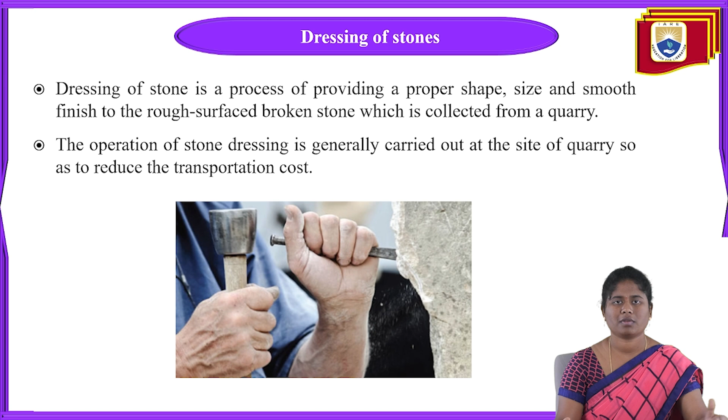Dressing of stones is generally done using hand tools like chisels, pickaxes, etc. Once the quarrying process is done, the stones are cut into suitable size and the surface is finished. As I told you, after quarrying, at that site we cut the stones into a specific or suitable shape or size. After cutting, we polish the stones so the surface is smoother.

Only then can we use the stones for aesthetic or decorative purposes, and for foundations also. After dressing, we use the stones for construction, decoration, and foundations. Once quarrying is done, the stones are cut into suitable size and shape, and the surface is finished; this process is termed dressing of stones. Effective dressing of stones helps make our structure attractive and also economical.

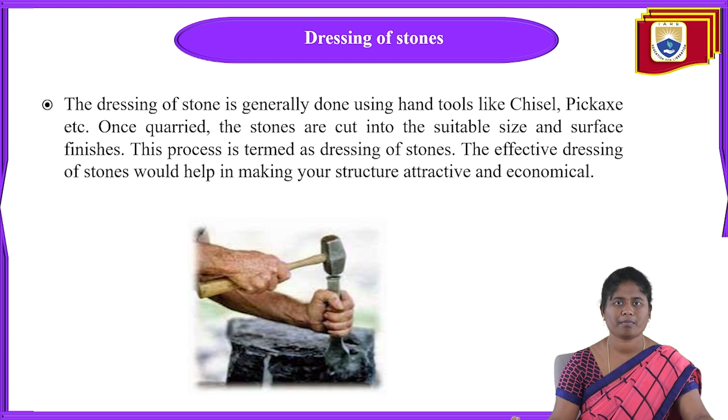What is the purpose of dressing stones? First we do the quarrying of stones, and after that, at the site itself, dressing should be done to reduce the transportation cost. We take machinery for dressing to the site, including different types of hammers and polishing machines. At the site we give the shape to the stones, cutting them into a square shape, and then polish them. Finishing and polishing are all done in dressing of stones.

Here you can see the four purposes of dressing of stones. The first one is less weight for transportation. If dressing is done at the quarry site after quarrying, we can easily reduce the transportation cost. That's why dressing of stones is done at the quarrying site.

The next one is appearance. After quarrying, the stones will be irregular in shape, size and texture, and there will be no smoothness. After dressing, the stones have a neat appearance. We neatly cut them using chisels and hammers, and then give them a smooth texture.

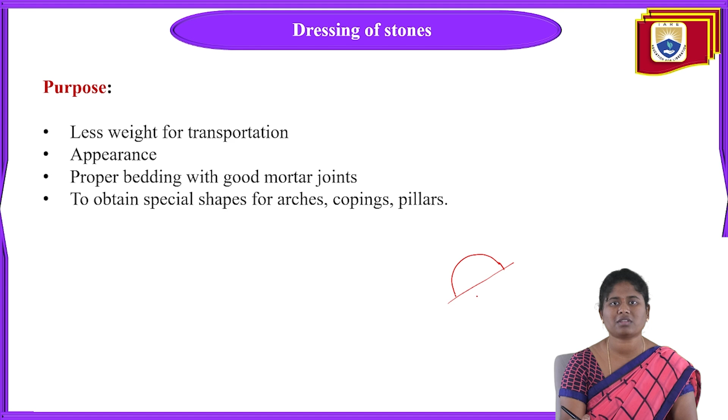There you can see why we have to reduce the size: big blocks of stones will be there, so we convert them to easily liftable pieces. After cutting the stones, we can easily transport them. That's why you have to cut the stones. This reduction of size is generally carried out at the quarrying site itself, especially to reduce the transportation cost.

The next one is to give a proper shape to the stone, because it can be used in different types of construction purposes, like flooring, foundations, walls, arches. The requirement of the stone is different for each purpose. In foundations, the stone may be irregular or angular, and in arches and flooring, the stone size should be different. That's why for each aspect we use different sizes of stones, and a proper shape should be given to the stones.

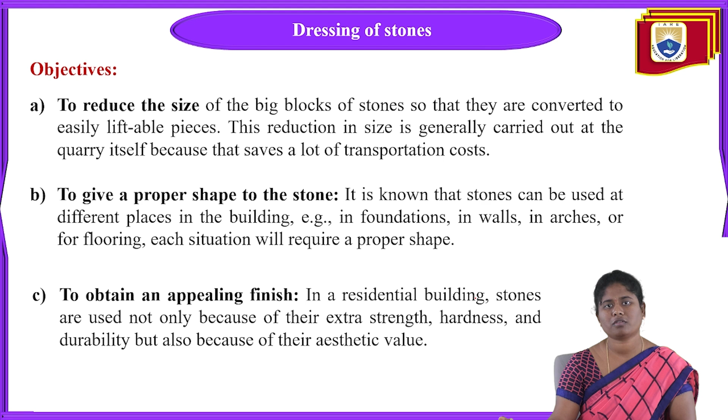Next one, to obtain an appealing finish. Appealing means beautiful, attractive. We can do this by dressing of stones. In residential buildings, nowadays stones are used for decorative and aesthetic purposes also, using irregular or rounded shapes, and we give those stones a specific shape. In residential buildings these stones are used not only because of their strength, hardness, durability, but also for the aesthetic value, meaning the attractiveness of the structure. That's why we do dressing of stones for different aspects in the construction field.

We have to draw this line, and that chisel should be taken to that line. By using this hammer, we have to make that rock into the desired shape. We can cut it into a desired shape.

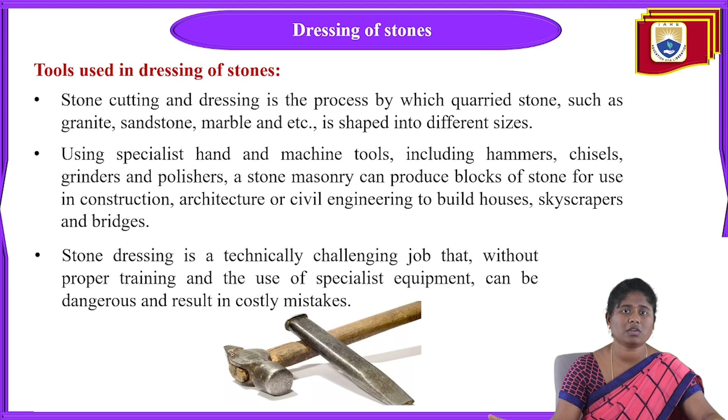If you take specialist people, they can do the work within a specific time. If you give the work to other people without specialization, it will be very dangerous and also time-taking. For this, whether machine tools or hand tools, specialists should take the work, otherwise it can result in costly mistakes. First one is the face hammer.

This face hammer is used for bigger and heavier stones. This double-faced hammer can break quarried stone into smaller blocks for preparation of finer dressing. This face hammer can be used for cutting stones and cutting them into small blocks also.

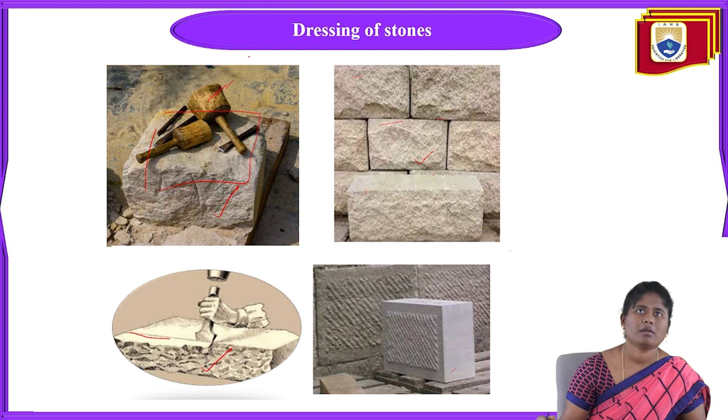For softer stone, it is cut using a wooden mallet - here you can see this is the wooden mallet. The face hammer can be used for strong, heavier stones, but the wooden mallet can be used for softer stones.

Next is the chisel. We have three types of chisels: first is point chisel, next is tooth chisel, and last is rounded chisel. This pointed chisel is named after its pointed end.

It is used to chip rough stone to a plane surface. This point chisel can be used for the dressing of stones to convert rough stone to plane surface.

The next one is tooth chisel, and this can be used for giving the smooth surface for the edges on soft stones. This tooth chisel has small teeth. It can be used to smooth out any remaining points or edges on soft stones, giving the smooth surface at the edges and at the remaining points also.

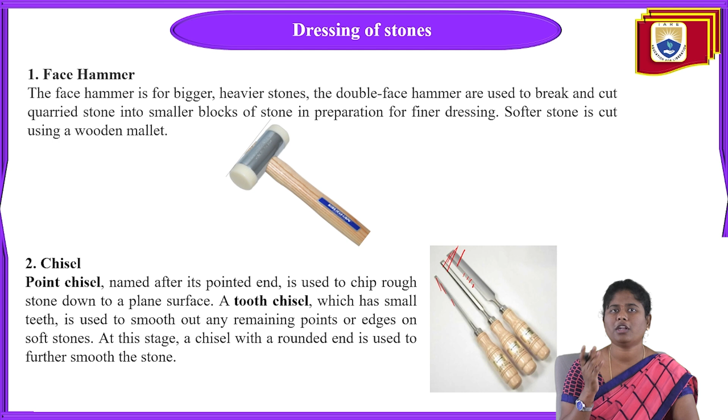This can be used after the point chisel. After using the point chisel, the surface of the stone will be plane, and at that time this pin hammer can be used in preparation for the patent hammer.

For rubble work, such as using stones in foundation walls, we can use the pin hammer, because for these a finer shaping tool is not needed.

And next one is patent hammer. This patent hammer has two faces made from thin pieces of steel bolted together in parallel. It is used for fine finishing on stones like granite, limestone, sandstone, etc.

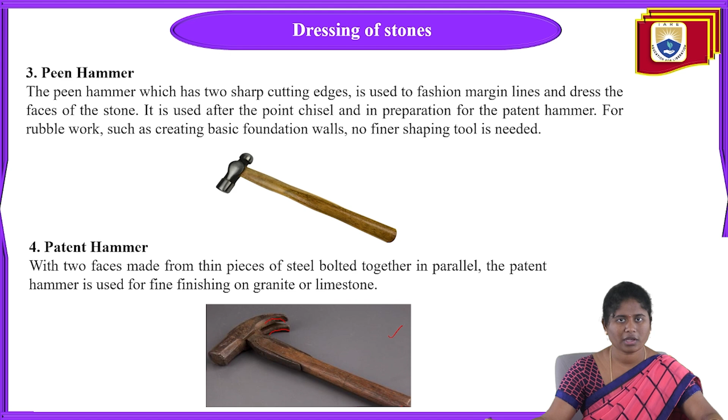And the last one, machine tools. These are different types of machinery used for the dressing of stones. For hand tools, we have now studied tools like chisels, bush hammer, patent hammer, and peen hammer. These are all the hand tools we use for the dressing of stones.

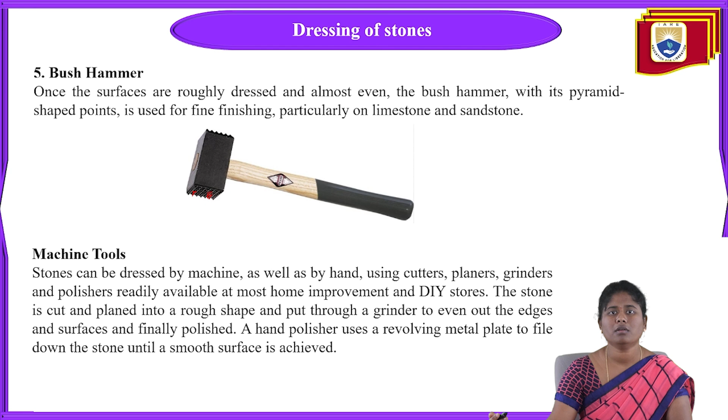The first stage is sizing. Sizing means after taking the quarried rock, which can be irregular, it has to be cut into desired dimensions using hammers, chisels, or cutting machines.

As I already told you, hand tools and machine tools can both be used. For hand tools, we make use of specialist tools for the process. The irregular quarried rock is taken and cut into desired dimensions by removing extra portions. This is called sizing, done using hammers, chisels, and cutting machines.

Next is the shaping process. After sizing the quarried stone, it is given desired dimensions, meaning we have to give the stone a desired shape.

Next is the planing process, which is nothing but removing irregularities from the stone surface. First we give sizing, meaning the rock is cut into desired dimensions. Next we give the rock a specified shape. Then we remove irregularities from the stone surface - that is called the planing process.

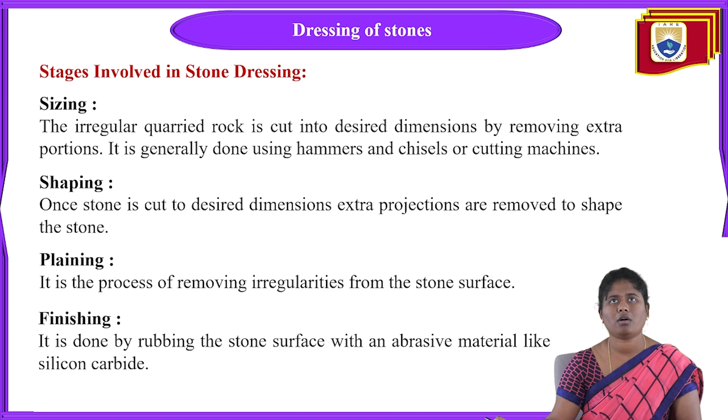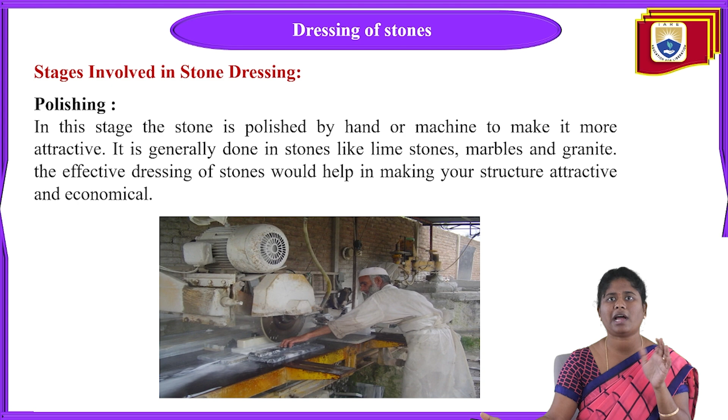After making it attractive, stones like limestone, marble, granite, and sandstone can easily undergo this polishing. Effective dressing of these stones helps make our structure attractive and also economical. That is called polishing.

Next, dressing of stones can be done manually and mechanically. For the manual process, skilled stonesmiths take charge and give the stones a specified, attractive shape - they can work wonders on these stones using chisels, hammers, and abrasives.

Next is the mechanical process. The manual process is done by human power only, while mechanical means we use machinery. Machines can cut stones to a desired size and shape, and their surfaces can be made extra smooth by polishing through machines as well.

I will explain dressing of stones in more detail in the next class. Thank you for today.